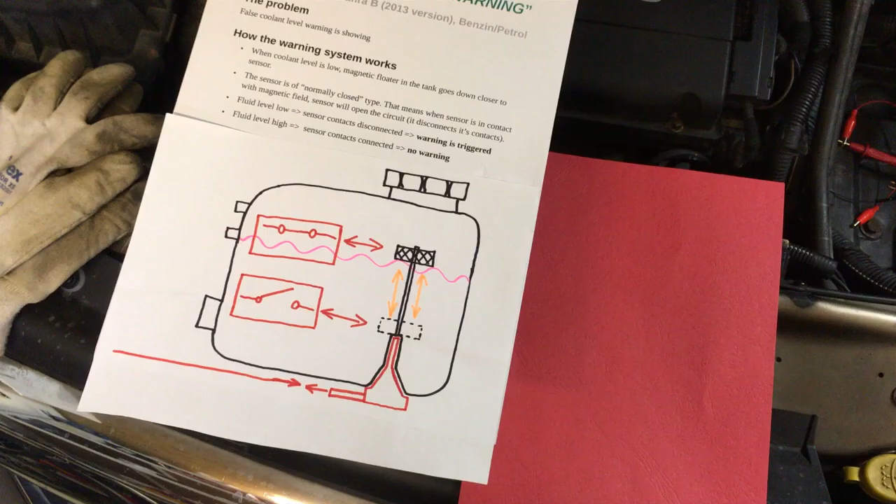Before you start any work, it is good to know how the system works. This is my understanding, it might be incorrect, but from my experience this is how it works.

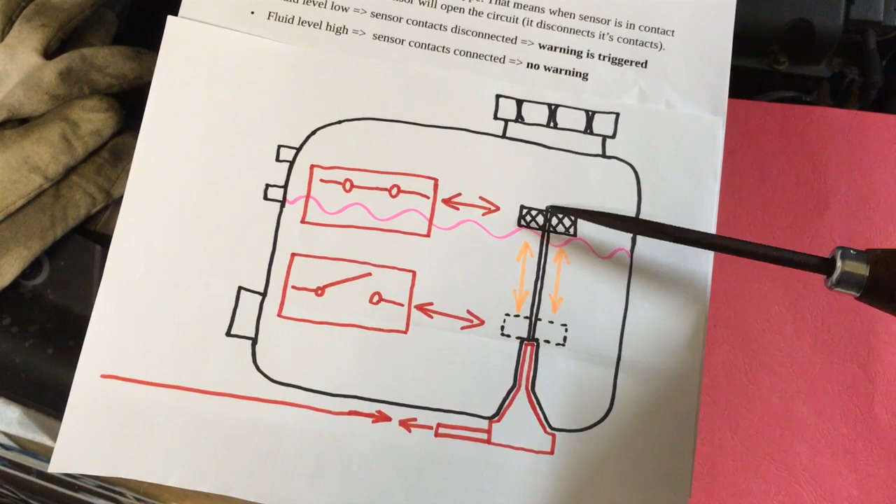This is the tank for the coolant. From the bottom there goes the sensor, it is a magnetic sensor. Inside the tank there is a floater with magnet, and if the liquid goes away, the floater with magnet goes closer to the sensor. In the presence of the magnet, the sensor will disconnect its contacts. This is basically a signal for the car that there is not enough liquid. If there is enough liquid, that means the floater is up away from the sensor, and the sensor will stay connected.

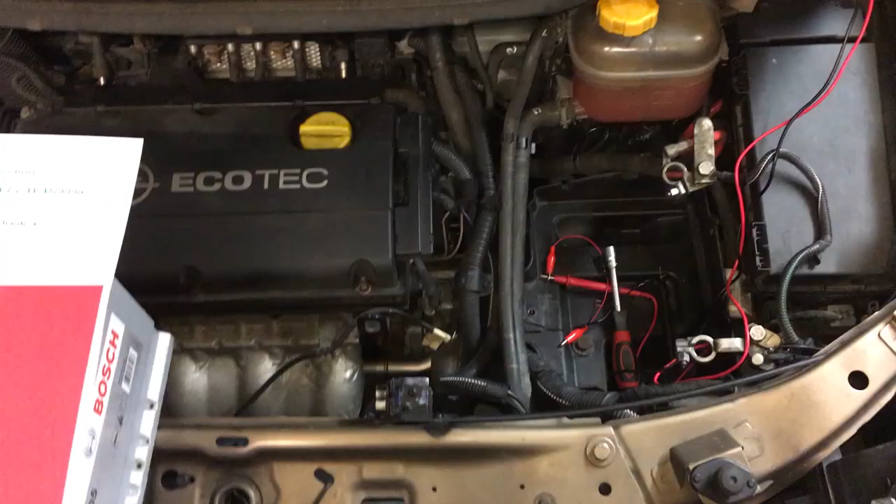So first thing, you obviously check if you have enough coolant liquid, like I have. The other thing, you can check the cables to the sensor. In order to do that, you need to make some room. You will take out the battery, like I did here. And then you can check the cable itself, if it's loose or if there is liquid inside, and the cables should not be snapped or have any damage.

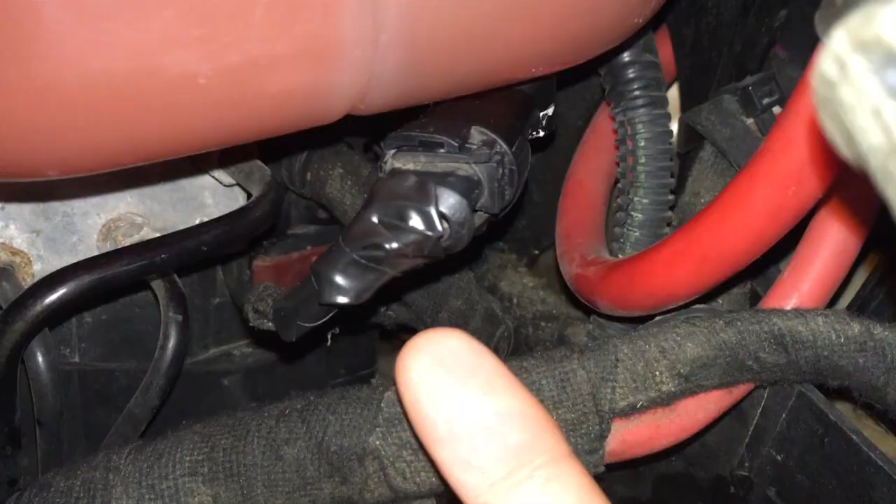This connector is a little bit hard to disconnect. Push this lever down and then slide this plastic part out. Then you will push the plastic lever from the bottom and then you can take out the connector.

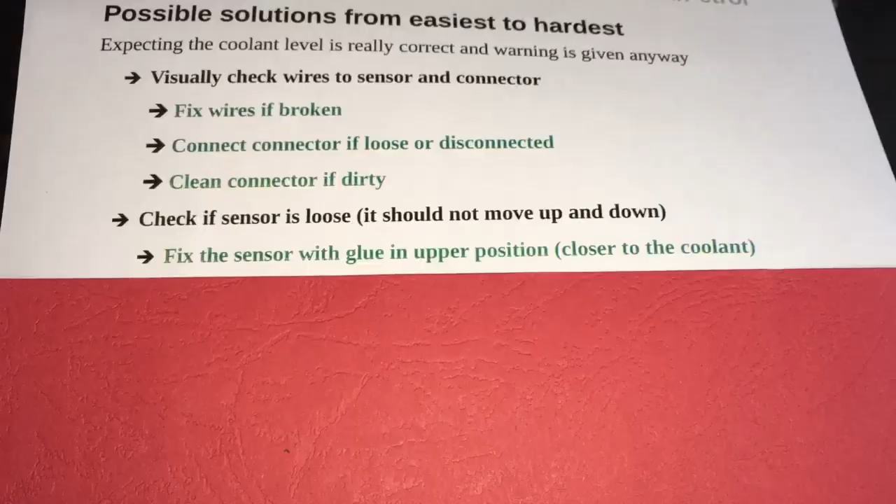The other thing you can check is if the sensor is not moving up and down. In my case, it was the problem because my sensor, if I pull it down, it moves down, and if I push it, it moves up. This is the problem in my case. In your case, maybe different.

So I will need to fix this, put some glue in there, or just completely replace the tank and sensor. But I already measured it with my multimeter. I put the contacts from the multimeter into these two pins from the sensor, and when I'm moving it up and down, it will just change its state. The car thinks that one time there is not fluid, then there is enough fluid, based on how bumpy the road is or something, I don't know. So this was my problem.

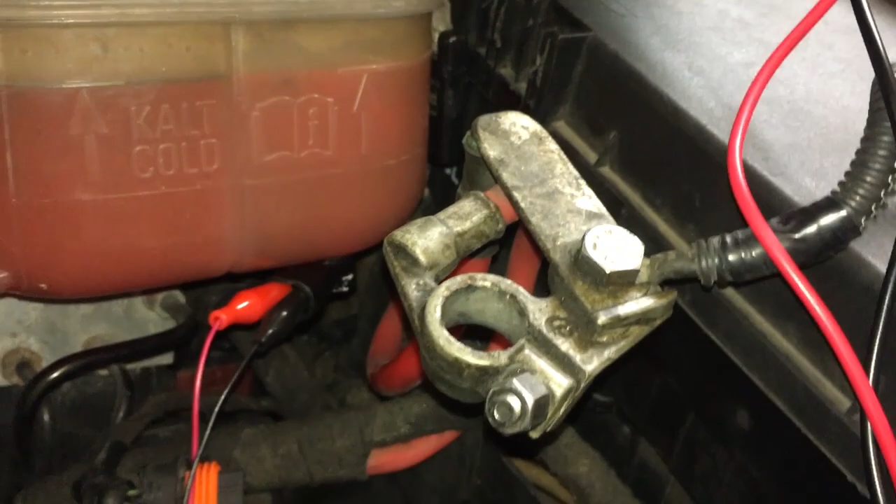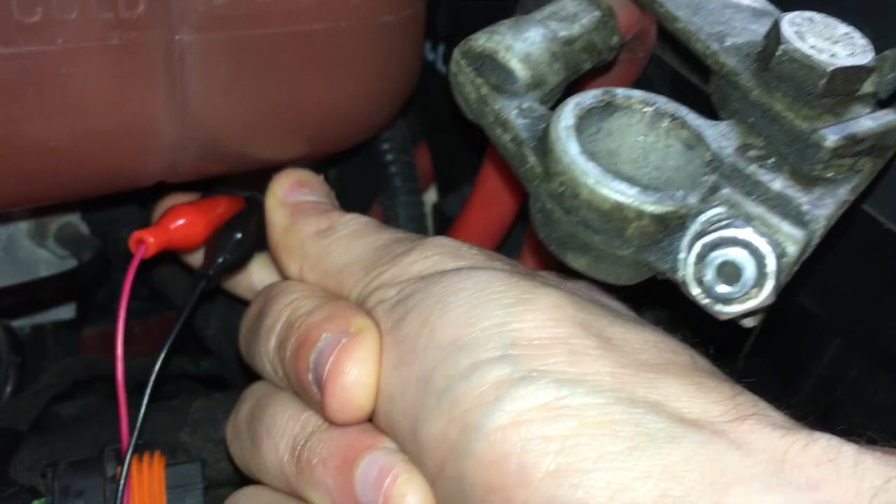Let me demonstrate. Now you can see there is enough fluid, the sensor is there, but the sensor is signaling that the circuit is open. So if I hook it on, the car will think there is not enough fluid. But when I move the sensor up like this, now there is connection, and the car would correctly think that there is enough fluid. So the problem is that the sensor is loose, it is moving up and down. Right now it's not reacting, but sometimes when I push it down, it will disconnect. So it's a little bit tricky.

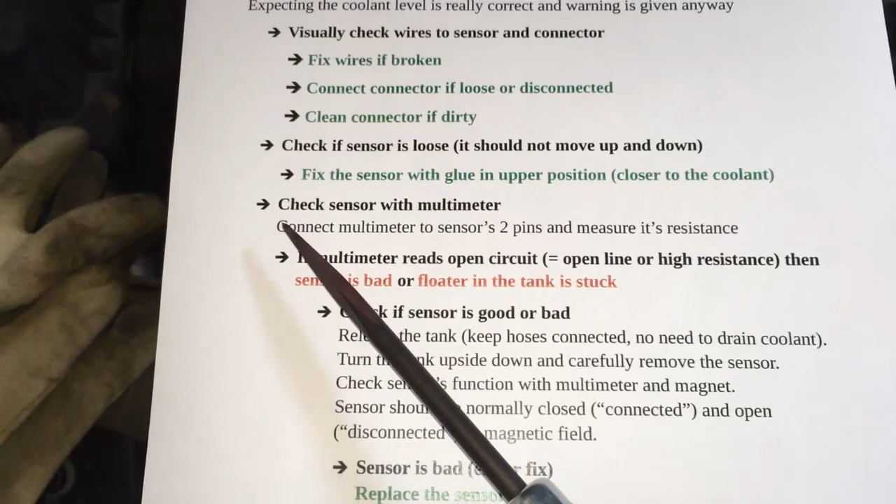So another thing, you can check the sensor with a multimeter. In order to do that, you need to remove the sensor from the tank. In order to remove the sensor from the tank, you need to take the whole tank out.

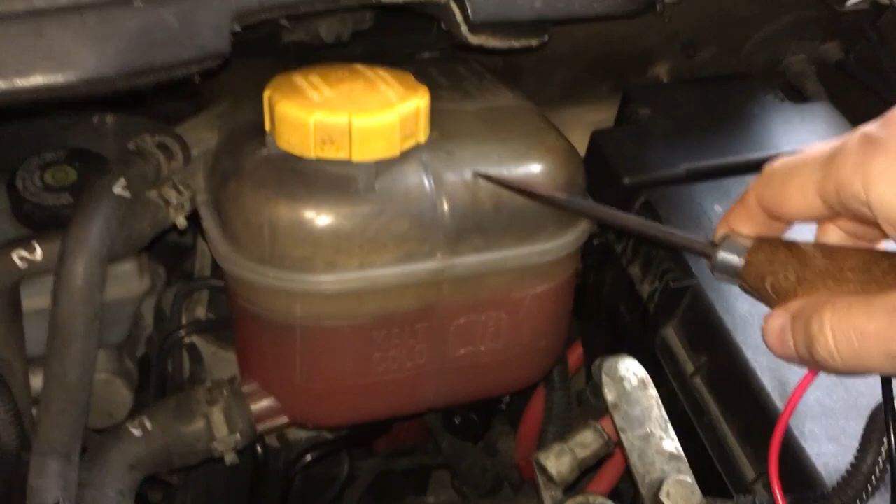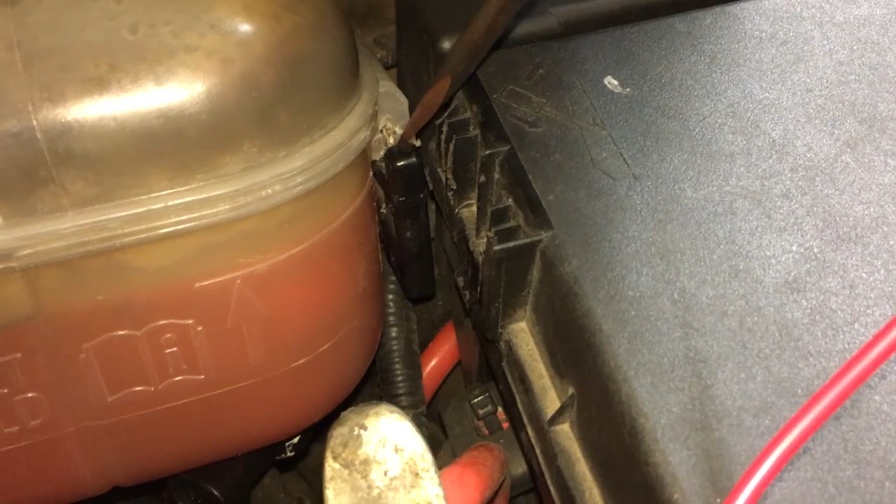Actually, you don't need to disconnect these hoses. You just need to remove this plastic holder right here with a screwdriver or something, then remove these covers also with a screwdriver. Make sure you push it in the correct way, like I did here - I just broke off this part, this holder. Then you need to take out this cover, you can do that by hand I believe. Obviously the battery has to be out, like here. Then you will slide this tank towards you, this way, and then just turn it around, and from the bottom you will take out the sensor.

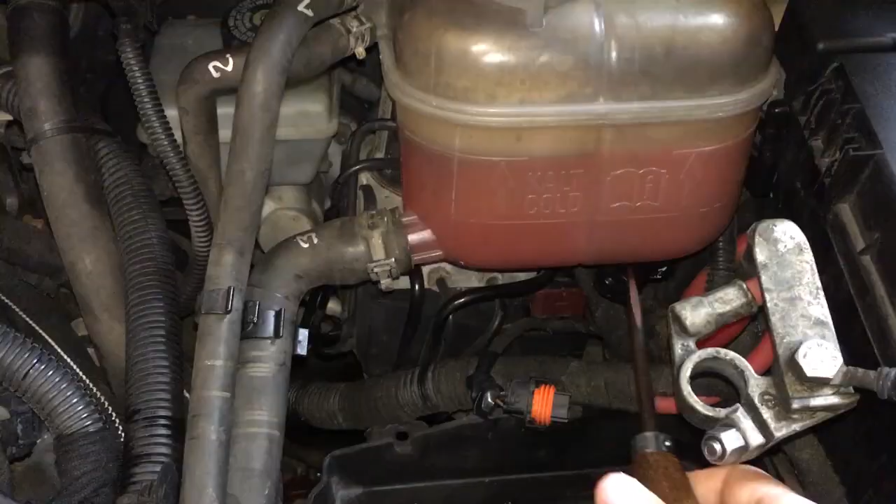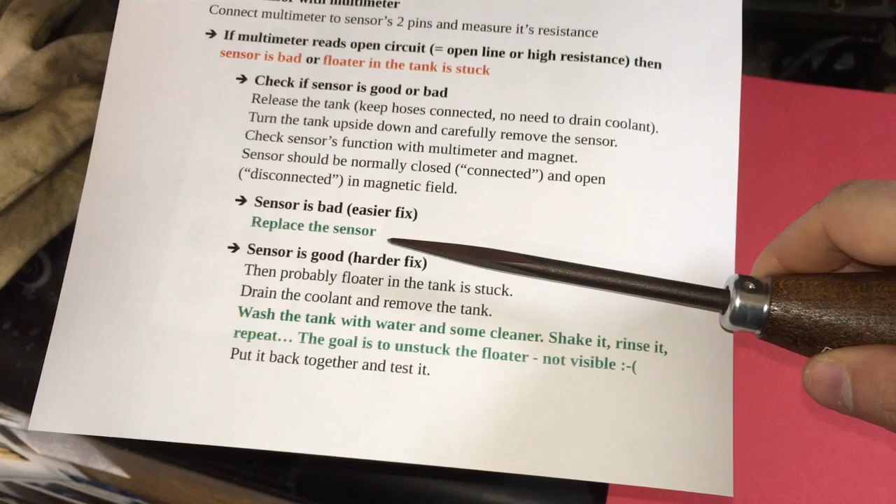So you check the sensor, and if the sensor is bad, you can just replace it. But if the sensor is good, then you need to maybe clean this tank in order to unstick the floater, because the floater may be stuck and causing the sensor to have bad readings.

So in order to remove the tank, you need to remove this plastic holder here, remove this cover, remove this cover. You need to first open this lid and drain the fluid from the system - underneath the car there is a valve. Then you need to remove these hoses here, and then slide this tank towards you and take it away, and put some water in there with some cleaner, then shake it up and down, left and right. Do that many times, and hopefully the floater will unstick, if that's the case. Then you will just put it back together and check it.

So that's it, and I hope this video will help somebody. If you have any other solutions, you can write it in the comments. It might help somebody.